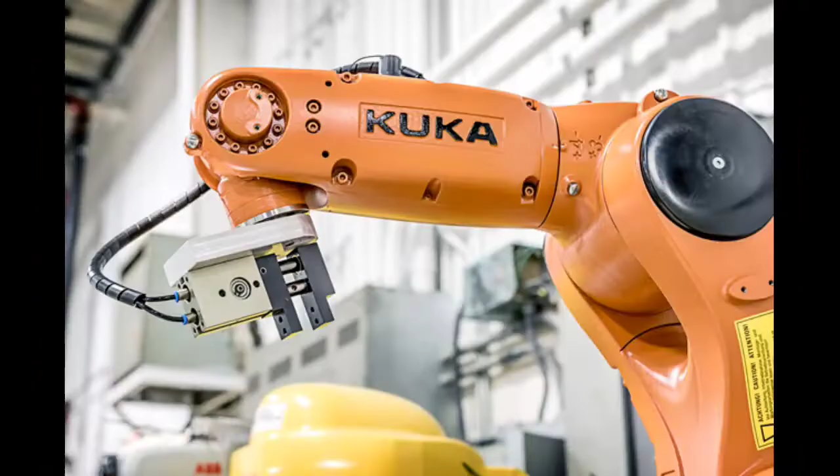Let's continue from the additional protective equipment. Jog mode. In the operating modes T1 manual reduced velocity and T2 manual high velocity, the robot controller can only execute programs in jog mode. This means that it is necessary to hold down an enabling switch and the start key in order to execute

a program. Releasing the enabling switch triggers a safety stop 2. Pressing the enabling switch down fully, panic position, triggers a safety stop 1. Releasing the start key triggers a stop 2.

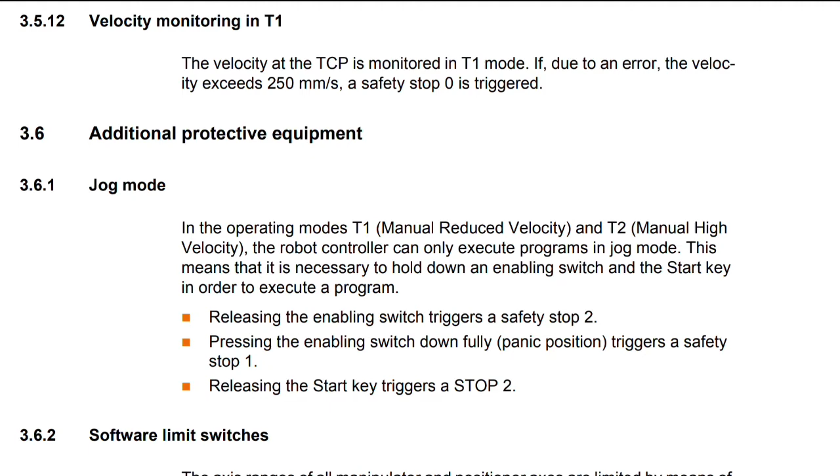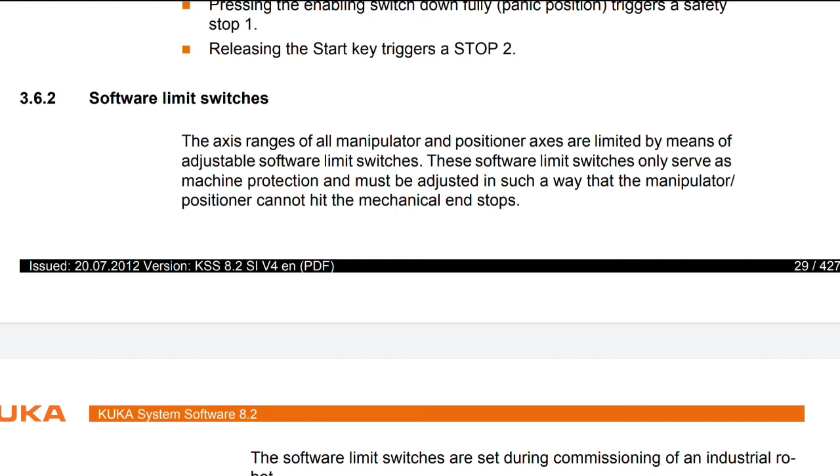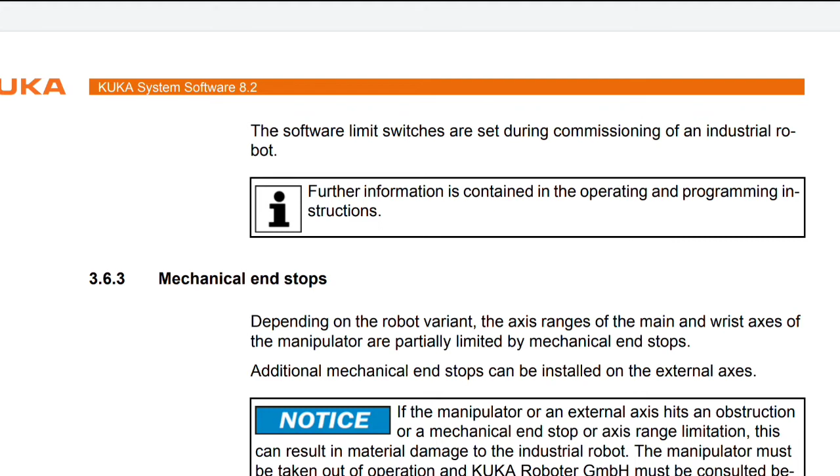Software limit switches. The axis ranges of all manipulator and positioner axes are limited by means of adjustable software limit switches. These software limit switches only serve as machine protection and must be adjusted in such a way that the manipulator positioner cannot hit the mechanical end stops. The software limit switches are set during commissioning of the industrial robot. Further information is contained in the operating and programming instructions.

Mechanical end stops. Depending on the robot variant, the axis ranges of the main and wrist axes of the manipulator are partially limited by mechanical end stops. Additional mechanical end stops can be installed on the external axes. Notice: if the manipulator or an external axis hits an obstruction or a mechanical end stop or axis range limitation, this can result in material damage to the industrial robot. The manipulator must be taken out of operation and KUKA Roboter GmbH must be consulted before it is put back into operation.

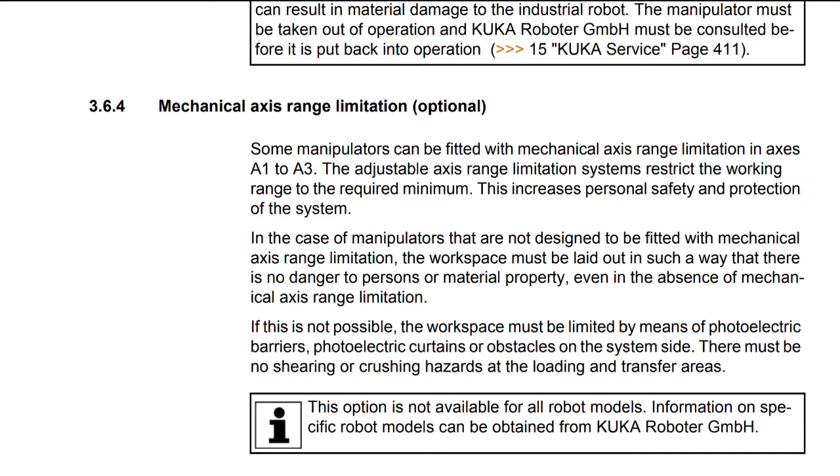Mechanical axis range limitation. Some manipulators can be fitted with mechanical axis range limitation in axes A1 to A3. The adjustable axis range limitation systems restrict the working ranges to the required minimum. This increases personal safety and protection of the system. In the case of manipulators that are not designed to be fitted with mechanical axis range limitation, the workspace must be laid out in such a way that there is no danger to persons or material property, even in the absence of mechanical axis range limitation.

If this is not possible, the workspace must be limited by means of photoelectric barriers, photoelectric curtains or obstacles on the system side. There must be no shearing or crushing hazards at the loading and transfer areas. This option is not available for all robot models. Information on specific robot models can be obtained from KUKA Roboter GmbH.

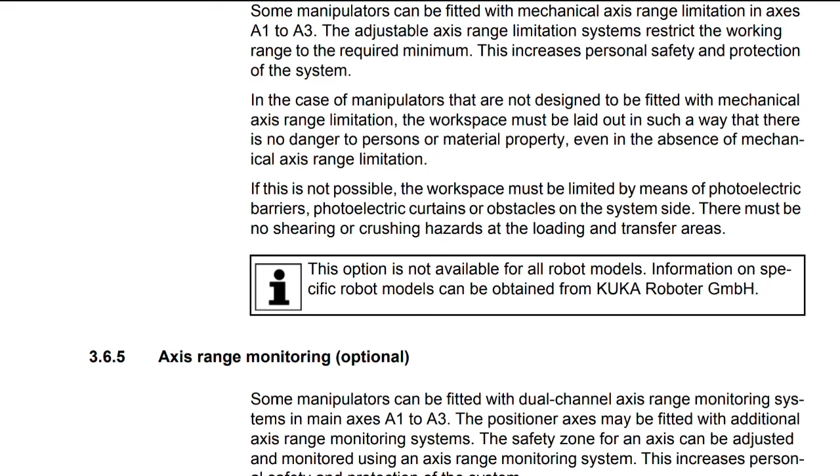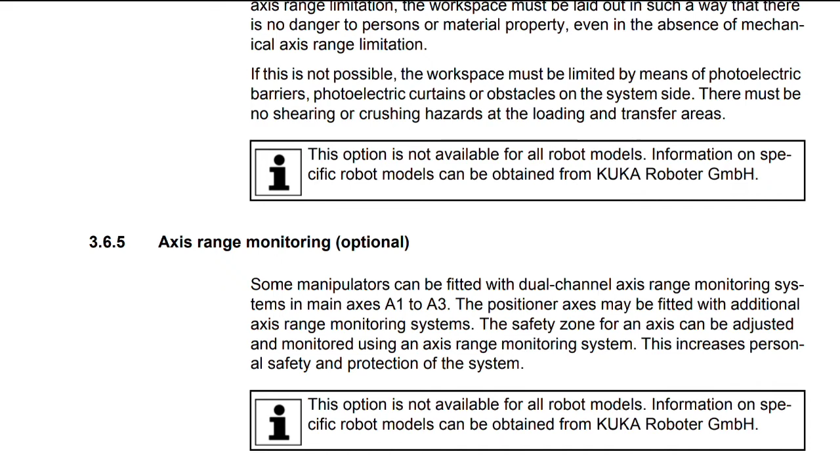Axis range monitoring. Some manipulators can be fitted with dual-channel axis range monitoring systems in main axes A1 to A3. The positioner axes may be fitted with additional axis range monitoring systems. The safety zone for an axis can be adjusted and monitored using an axis range monitoring system. This increases personal safety and protection of the system. This option is not available for all robot models. Information on specific robot models can be obtained from KUKA Roboter GmbH.

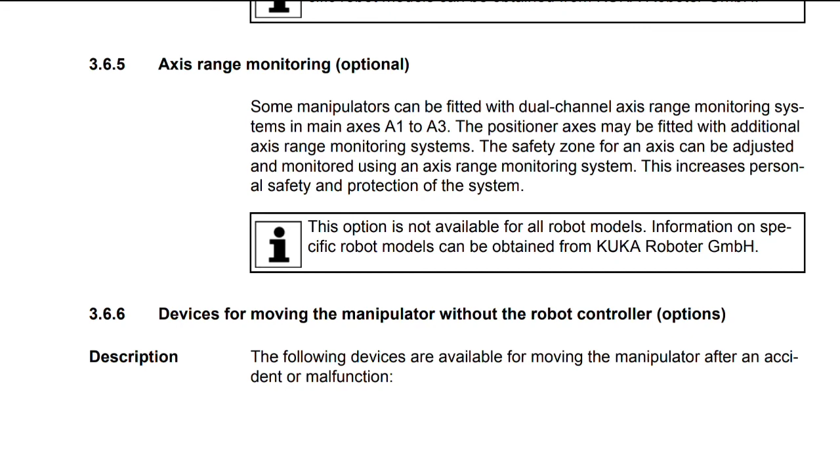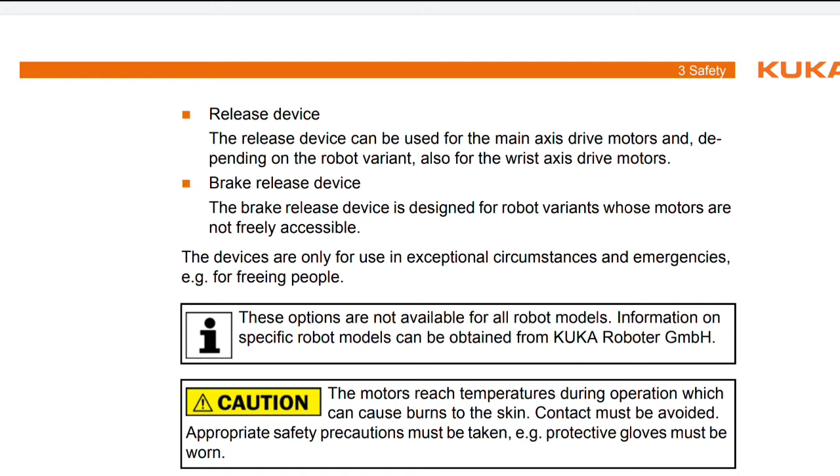Devices for moving the manipulator without the robot controller. Description. The following devices are available for moving the manipulator after an accident or malfunction. Release device. The release device can be used for the main axis drive motors and, depending on the robot variant, also for the wrist axis drive motors. Brake release device. The brake release device is designed for robot variants whose motors are not freely accessible. The devices are only for use in exceptional circumstances and emergencies, for example, for freeing people. These options are not available for all robot models. Information on specific robot models can be obtained from KUKA Roboter GmbH.

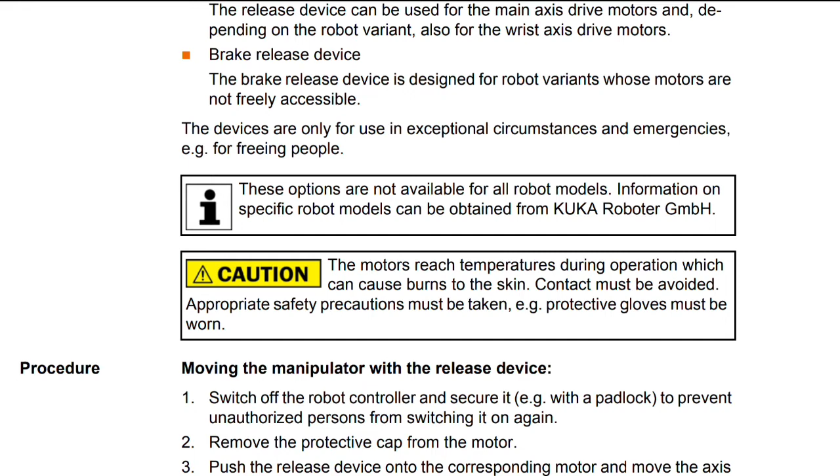Caution. The motors reach temperatures during operation which can cause burns to the skin. Contact must be avoided. Safety precautions must be taken, for example, protective gloves must be worn. Procedure. Moving the manipulator with the release device. Switch off the robot controller and secure it to prevent unauthorized persons from switching it on again. Remove the protective cap from the motor. Push the release device onto the corresponding motor and move the axis in the desired direction. The directions are indicated with arrows on the motors. It is necessary to overcome the resistance of the mechanical motor brake and any other loads acting on the axis.

Warning: moving an axis with the release device can damage the motor brake. This can result in personal injury and material damage. After using the release device, the motor must be exchanged. Warning: if a robot axis has been moved by the release device, all robot axes must be remastered. Serious injuries or damage to property may otherwise result.

Procedure: moving the manipulator with the brake release device. Warning: use of the brake release device may result in unexpected robot motions, especially sagging of the axes. During use of the brake release device, attention must be paid to motion of this kind in order to be able to prevent physical injuries or damage to property. Standing under moving axes is not permitted. Switch off the robot controller and secure it to prevent unauthorized persons from switching it on again.

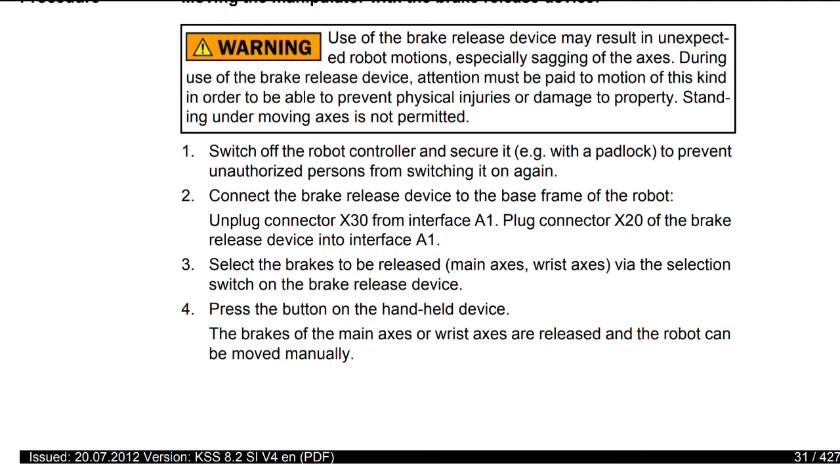Connect the brake release device to the base frame of the robot. Unplug connector X30 from interface A1. Plug connector X20 of the brake release device into interface A1. Select the brakes to be released, main axes or wrist axes, via the selection switch on the brake release device. Press the button on the handheld device. The brakes of the main axes or wrist axes are released and the robot can be moved manually. Further information about the brake release device can be found in the documentation for the brake release device.

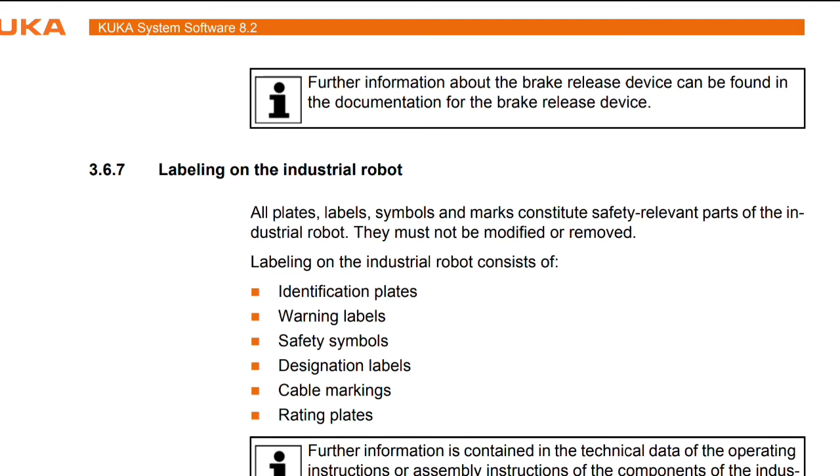Labeling on the industrial robot. All plates, labels, symbols and marks constitute safety-relevant parts of the industrial robot. They must not be modified or removed. Labeling on the industrial robot consists of identification plates, warning labels, safety symbols, designation labels, cable markings, rating plates. Further information is contained in the technical data of the operating instructions or assembly instructions of the components of the industrial robot. That's it for today's video.